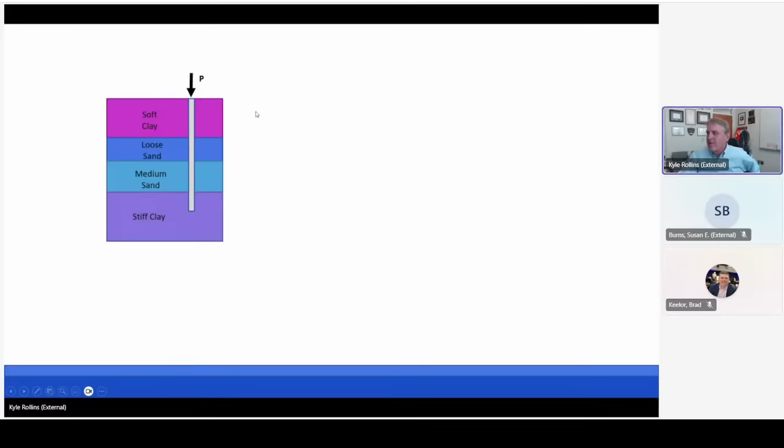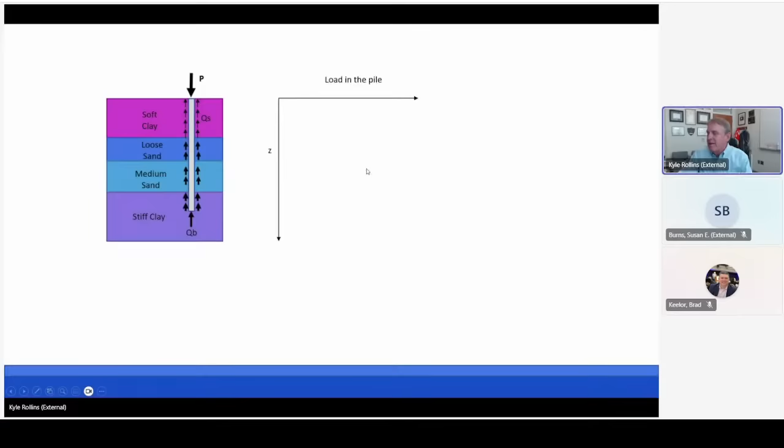When we look at soft profiles that might have liquefiable layers, one approach is typically to use driven piles or drilled shafts. And then in that process, the applied load P here is carried by side friction, Q sub S, along the length of the pile, and toe resistance, Q sub B. If we plot the load in the pile versus depth here, we'll start out with a load of P at the top of the ground surface. And as we go down into the soil, we'll have a reduction of load in the pile as load is transferred to the soil by side friction.

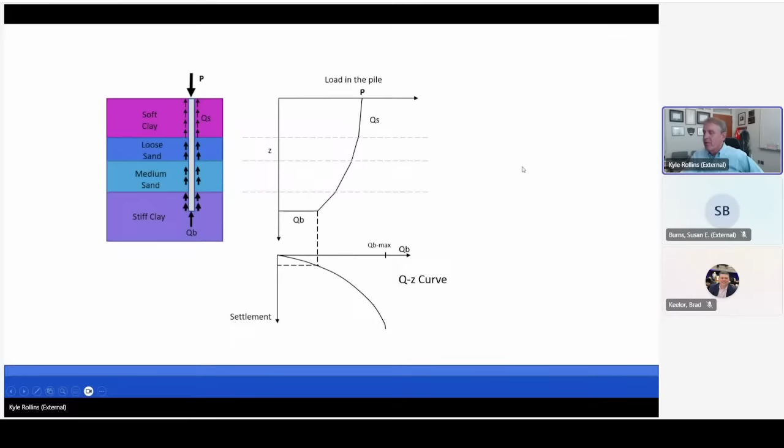At the bottom of the pile, we'll have a toe resistance that has to be carried by the base of the pile. Now that toe resistance can only develop with a certain amount of settlement, and we can estimate the settlement that might take place with a QZ curve. That's the toe resistance versus the toe settlement. So when we first develop the load on the pile, this will be our settlement.

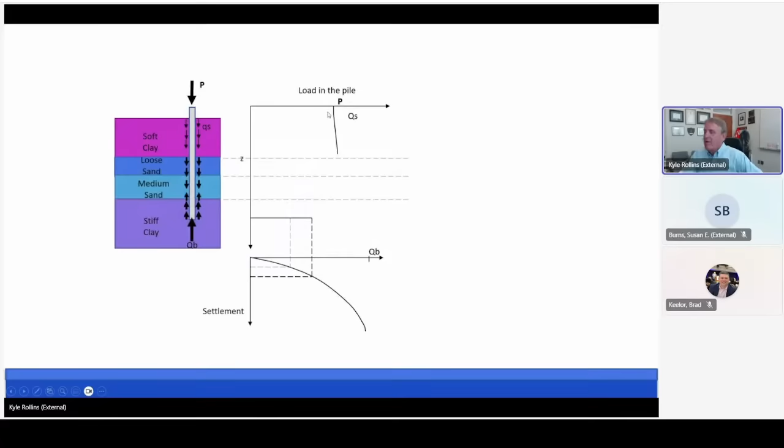If we have an earthquake event that causes shaking, the loose sand and medium sand might liquefy. And as that soil liquefies, the side resistance in that liquefied zone may go to close to 0, or maybe some small value residual strength. And that causes an increase in load to be transferred to the toe. And that increased load at the toe increases the settlement as well. Now, that's not all there is to it, because as the pore pressures dissipate and the soil starts to settle, we develop downdrag or negative friction or drag load in the top layer of soil, in this case, the soft clay. And that's not the only problem we might have, because now that's going to cause some additional settlement to take place.

Some people suggest using just a 0 value of negative friction in the liquefied zone. But if you think about it, the only way that the soil is going to really settle is if the excess pore pressures start to dissipate. And as they start to dissipate, effective stress goes up, and friction can develop on the side of the pile, which leads to downward force on the pile, or drag load. Now that process can lead to even additional settlement at the toe of the pile. So we need to take into account all these factors.

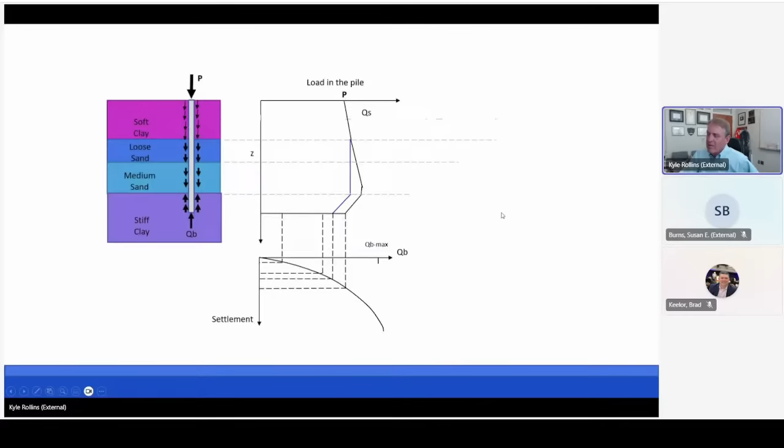From our testing in the field, and from testing at Brigham Young, and from centrifuge tests that have been done at UC Davis, there's good evidence to believe that we should design for something more than a 0 value in this liquefied zone. Now, we can identify the neutral plane here as the boundary between negative friction and positive friction. And that neutral plane also will give us a point, typically for simple problems like this, where the settlement of the soil is equal to the settlement of the pile.

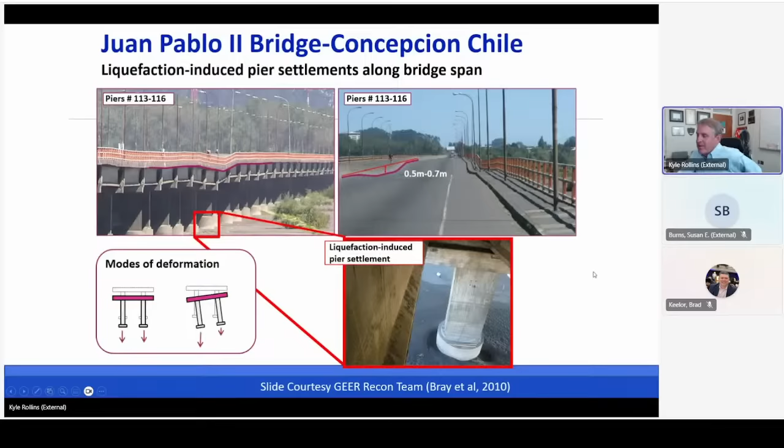Now, can this ever cause problems? Is this just something for academics to worry about? In the Concepcion, Chile earthquake in 2010, there was substantial damage due to liquefaction. And on Juan Pablo II Bridge, there were sections where the piles settled 0.5 meter or more. And investigation suggests that negative friction was playing a role in this excessive settlement.

At the Resurrection River Bridge in Seward, Alaska, during the 1964 Alaskan earthquake, liquefaction occurred even in these gravelly soils on the bridge abutments, and the settlement was great enough that the piles actually pulled out of the pile caps due to negative friction and drag loads. So it's a problem that we need to worry about.

Our research objectives over the last 10 years or so have been to measure the development of negative skin friction during liquefaction and reconsolidation. We want to see what happens to the non-liquefied soils above the liquefied layer and in the liquefied sand. We want to see if the neutral plane concept can account for the pile settlement that we're expecting to see. We've also tried to investigate whether tapered piles can reduce negative friction in comparison with cylindrical piles, and investigated both liquefied and non-liquefied cases.

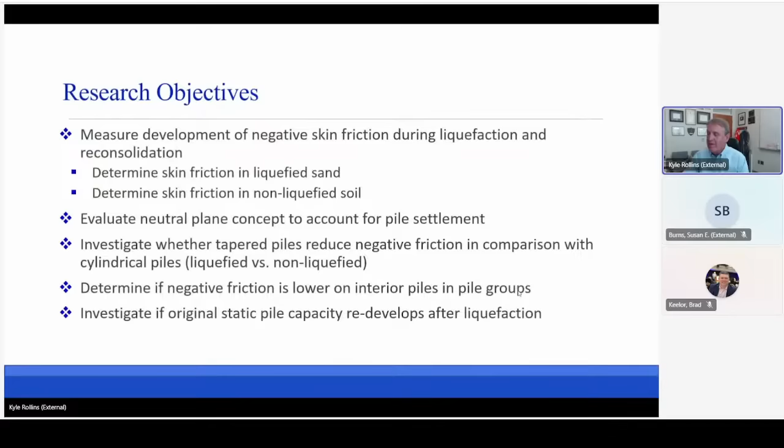And if we get time, we'll look at the behavior of pile groups where we think negative friction could be lower on the interior piles in the group, and investigate last if the original static capacity can redevelop after liquefaction has taken place, or if we need to account for that reduction going forward.

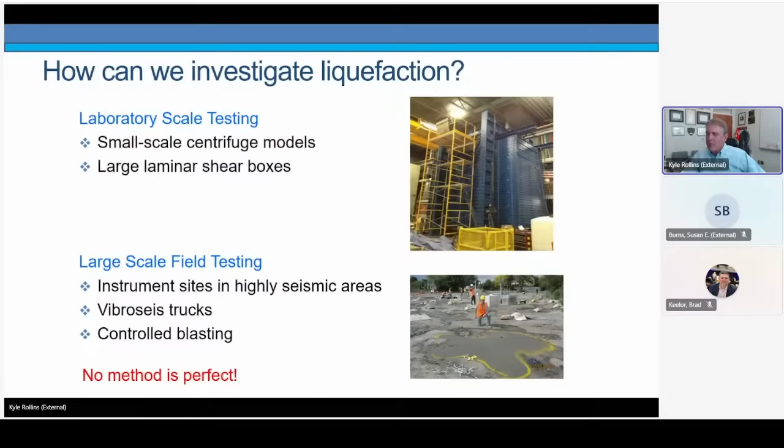If you look at large-scale tests, maybe you could instrument a site in a highly seismic area. Hopefully, while your instrumentation is all working, an earthquake would strike and you'd learn something about what's going on. This is a long waiting game. Other alternatives would be to use vibroseis trucks like T-Rex at University of Texas, which can induce cyclic shearing, or use controlled blasting. Now, none of these methods are perfect. Each one has its limitations and advantages. So looking at everything we can get together, it adds another piece to the puzzle to help us understand what's really going on.

When it comes to blast liquefaction, the advantages are that we can test at full scale. We can test the native soil in situ with the real microstructure and aging effects. We can liquefy large volumes at one time to investigate system performance rather than just a small element. And we can liquefy to significant depths, more than 15 meters. And another advantage is that we can produce settlements that are similar to earthquake-induced values, so that we are testing something that is a little more representative of what might happen in an earthquake.

Limitations are that the mechanism of pressure generation is not identical to an earthquake, although shear strains are the predominant cause of pore pressure generation. We need to calibrate the blast conditions to earthquake conditions, and that's going to require some more research. And we have to avoid vibration disturbance to adjacent people and structures. Lastly, the full-scale testing is more expensive than small-scale tests.

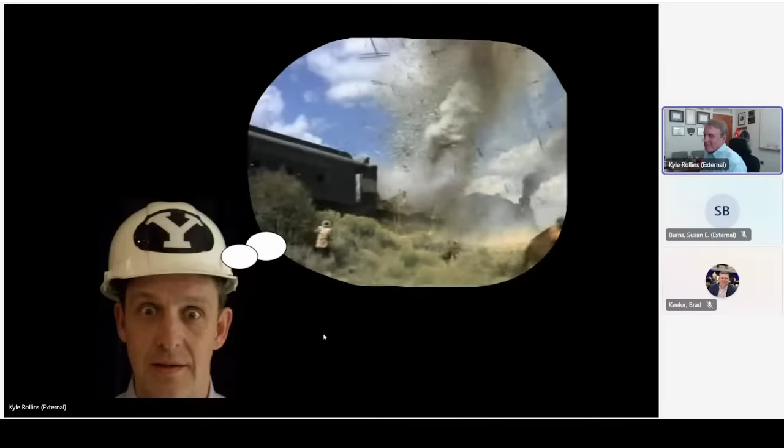So when I first heard about blast liquefaction, my mind went back to a Western called Butch Cassidy and the Sundance Kid, and this is the image that came to my mind. Butch was trying to use enough explosives to blow up the safe, get the money out. Think you're using enough dynamite there, Butch? So this is always a concern.

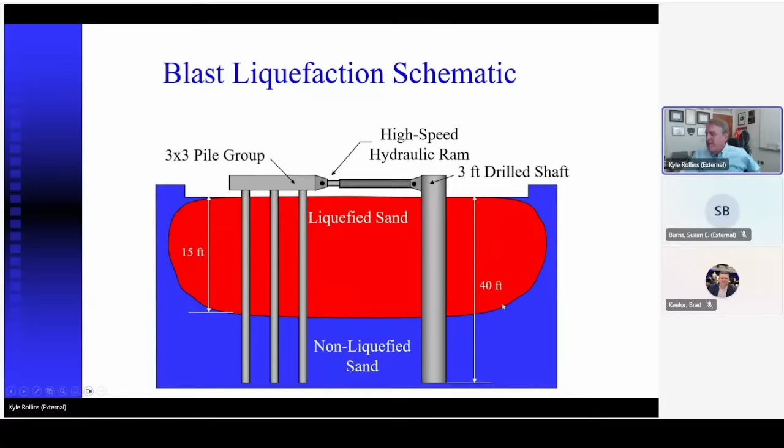We went to our first test site to do this in Treasure Island in San Francisco Bay. We were testing a 3x3 pile group against a 3-foot diameter drilled shaft. And we set off a series of small explosive charges, maybe 1 to 2 pounds, to liquefy a volume of soil. And then we used a high-speed hydraulic actuator to push the pile group against the drilled shaft. And we found that we could successfully liquefy soil and perform these tests without too much problems.

And so we started to look at other than laterally loaded piles in liquefied soil. We started doing tests to evaluate negative skin friction in downdrag conditions. So the first one was in Vancouver, British Columbia, a 32 centimeter, so a 1-foot diameter, steel pipe pile. Went to Christchurch, New Zealand, and investigated 2-foot diameter auger cast piles. Went to Mirabello, Italy, working with INGV, an Italian research agency, with I think 10-inch micro piles. Worked with Rick Coffman at the University of Arkansas in Turrell, Arkansas, looking at large drilled shafts and 18-inch driven piles.

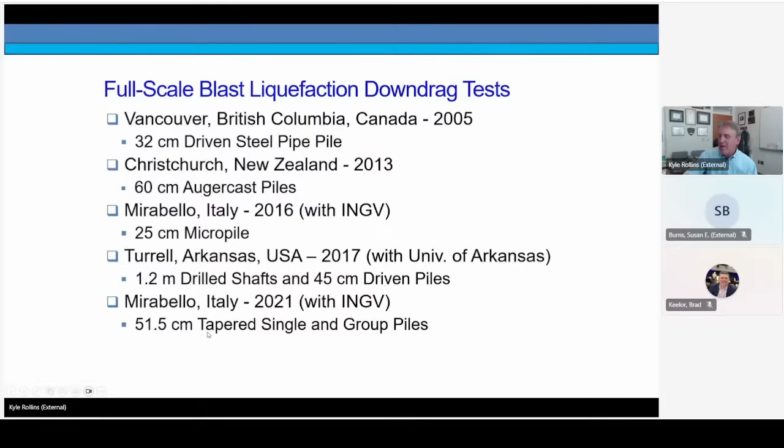And lastly, we've done some tests back at Mirabello, Italy again, with tapered single piles and pile groups to see how that might affect results. So I'm going to give you, before I start, our take on a design procedure for pile downdrag assessment.

And then the rest of the time, I'm going to try and indicate the evidence for what we're doing. So the first thing we need to do is estimate the settlement versus depth profile and assume a neutral plane location. So we could use any of a number of curves and equations that are out there to estimate the settlement versus depth.

So if we have our pile here and we've got a zone that might liquefy, we estimate the settlement, knowing the factor of safety and the density of the soil. So we could plot this settlement versus depth. And then we have to make an assumption about the neutral plane. So we're just going to make a guess to start with. We'll probably have to change it, but we just start out with a guess.

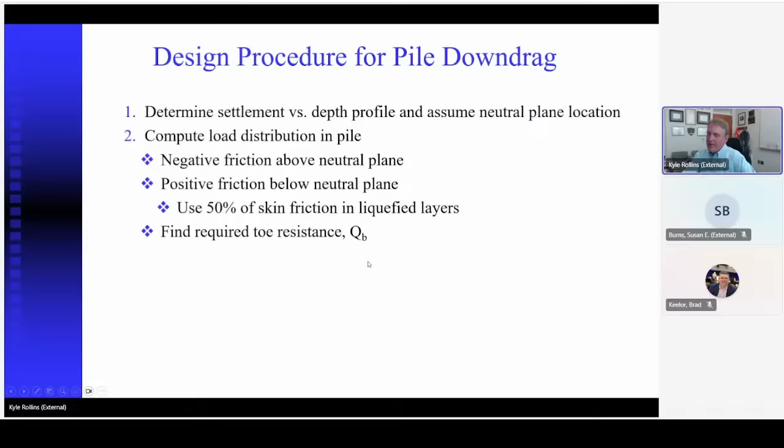Knowing that neutral plane location, we're going to compute negative skin friction above the neutral plane and positive skin friction below the neutral plane. And we're going to use 50% of the skin friction that we would have at the ultimate condition prior to liquefaction for the liquefied layers. And then we'll find from that the required toe resistance, Q sub B. So here's our applied pile load. We'll develop negative skin friction above the neutral plane, positive skin friction below the neutral plane. And then at the bottom, we'll determine the toe resistance that we have to support.

Now the next step is to determine the settlement at the toe of the pile. And we can get that by saying that the settlement of the pile at the neutral plane is equal to the settlement of the soil. We can subtract the elastic compression in the pile going down and get the settlement at the toe of the pile. We can add the elastic strains to the top and get the settlement at the top of the pile as well. So we next need to use a QZ curve to determine if the mobilized Q_B for toe settlement is equal to the required Q_B.

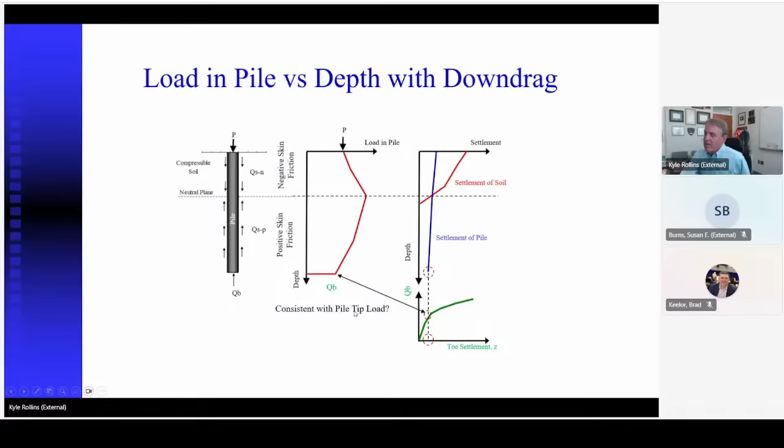So we're going to take this toe settlement and come up to our QZ curve. And then we have to compare to see if we have compatibility. Is it consistent with the toe tip resistance that we're expecting? And then we'll likely have to revise the location of the neutral plane and repeat the process until we get convergence.

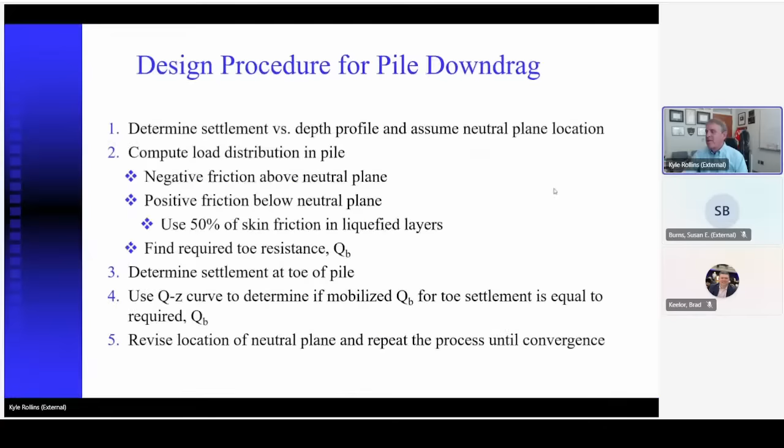So the first test we performed was in Vancouver, Canada, and it's reported by Rollins and Spencer. If you're a structural engineer, you might think a bridge would be a good idea here, but Massey Tunnel is located underneath the Fraser River at this location. And we got permission to do tests at this Canadian liquefaction experiment site. The soil profile at this site consists of fine sand and silty sand with some silt layers, which were not considered to be liquefiable.

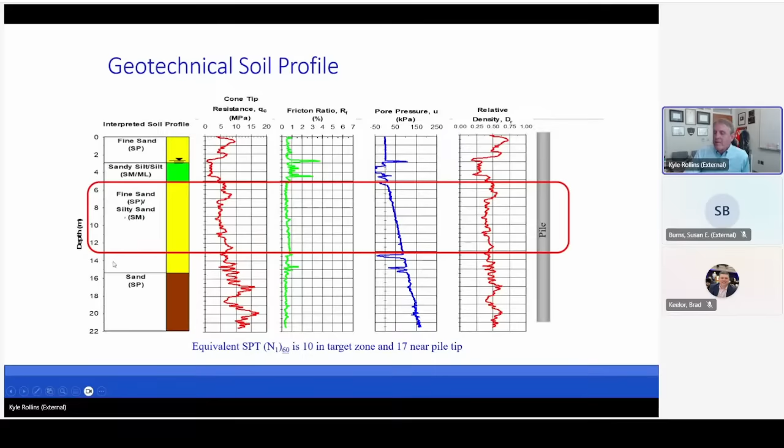The relative density is typically about 40% in this zone. Based on frozen samples, the equivalent SPT was taken as 10 in the target zone, and the value was 17 near the toe of the pile down here, which was about 21 meters below the ground. So our objective was to target this zone from about 5 meters to 13 meters to be liquefied with the explosives.

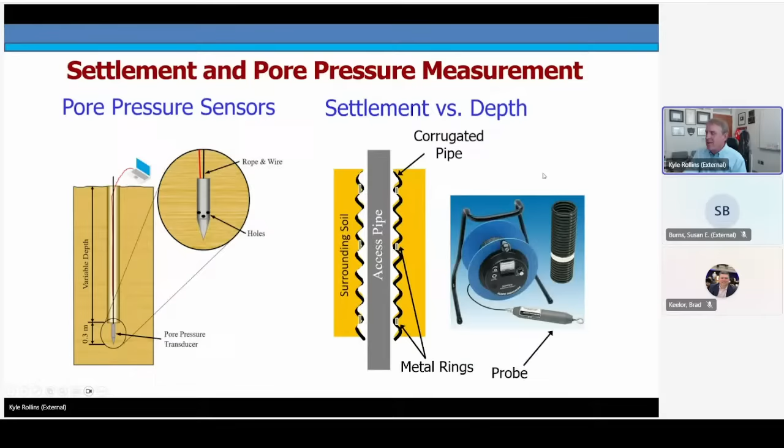So we had pore pressure sensors located at various depths throughout the profile. These can take the high transient blast pressures and not be damaged and give us reasonable accuracy, maybe 0.1 psi for the residual excess pore pressures. We also had a Sondex settlement system to monitor settlement versus depth. This consists of corrugated pipes with metallic rings. With this probe, we can identify where the rings are to start with and then go in and see where they ended up afterwards.

So when the explosives went off and the soil liquefied, you can see that drill rod settled about a foot. The settlement at the time of the blast caused a decrease in the force in the pile, about 160 kilonewtons or 36 kips.

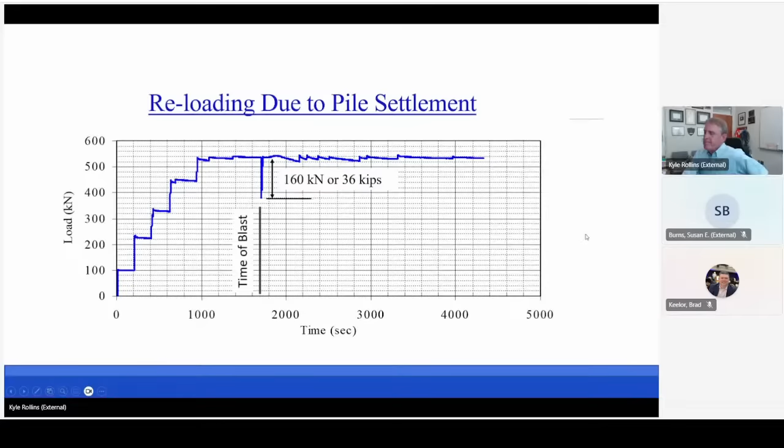After the blast detonation, the excess pore pressure started to dissipate with time. It took about, I think, 17 minutes for the excess pore pressures to dissipate back down to less than an RU of 0.1. The pore pressures dissipated from the bottom up. The top pore pressure sensor had the highest pore pressures throughout the dissipation process, or excess pore pressure, I should say. So let's take a look at the settlement trough that developed around the pile.

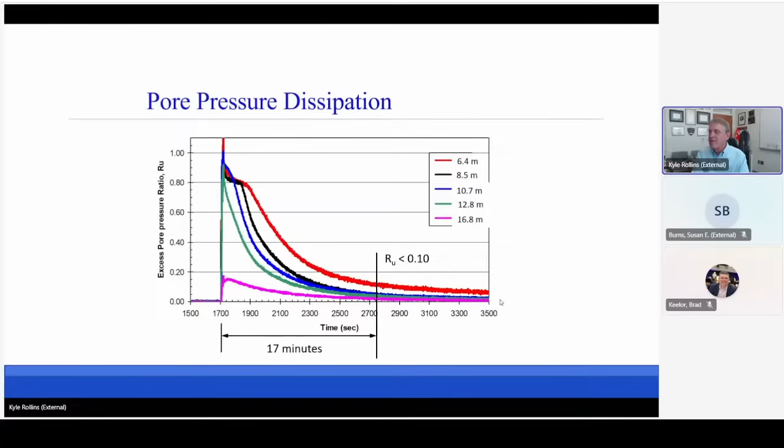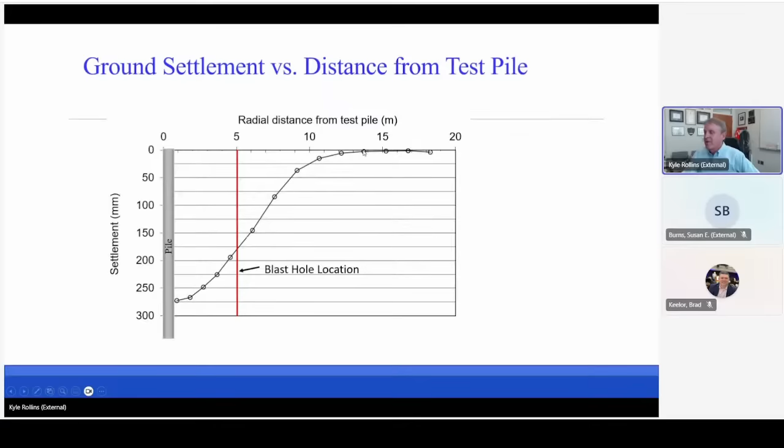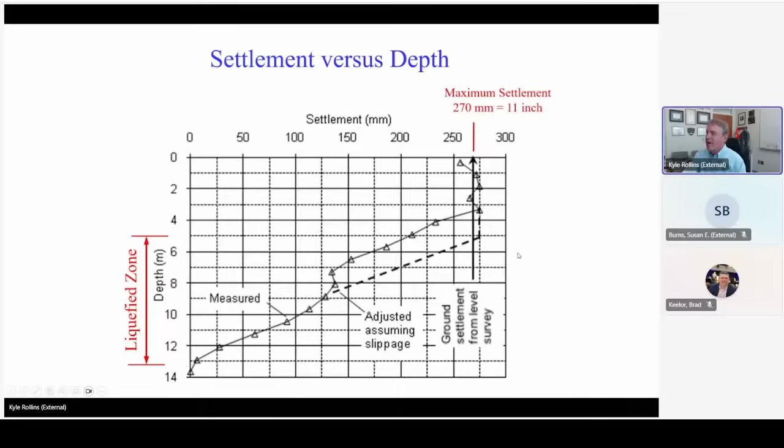This plot shows the settlement versus depth from the Sondex device. We think there's some slippage that takes place here, so we've extrapolated this out. And from the Sondex, we're measuring about the same amount as we're getting from the ground surface surveys. So a fairly linear settlement versus depth profile here with a maximum settlement of 11 inches.

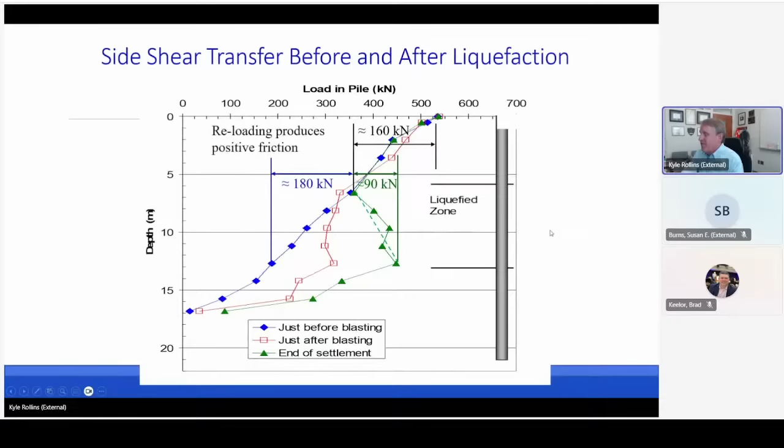If we look at the positive ultimate skin friction before the blast, it's about 180 kilonewtons in that liquefied zone. After liquefaction, the average resistance is about 90 kilonewtons. So our average resistance in the liquefied soil from negative skin friction is about half of the resistance that we'd expect to occur.

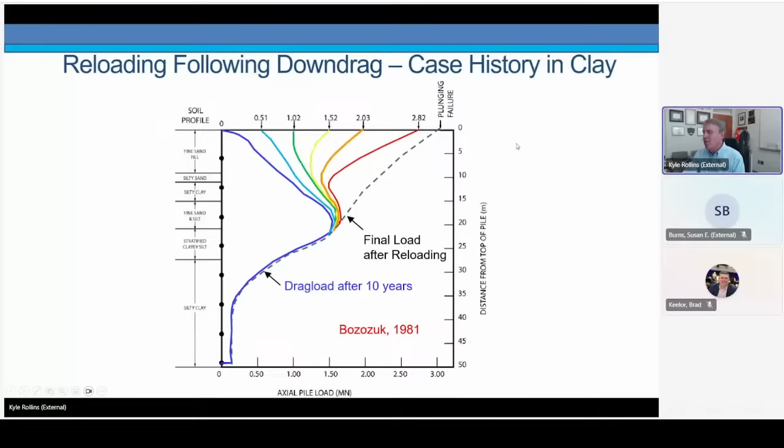And as they loaded the pile from the top down, you can see that the negative friction is decreasing and becoming positive, and eventually experience a plunging failure. So it's not unusual to see a positive skin friction develop from the top downward when we reload after liquefaction.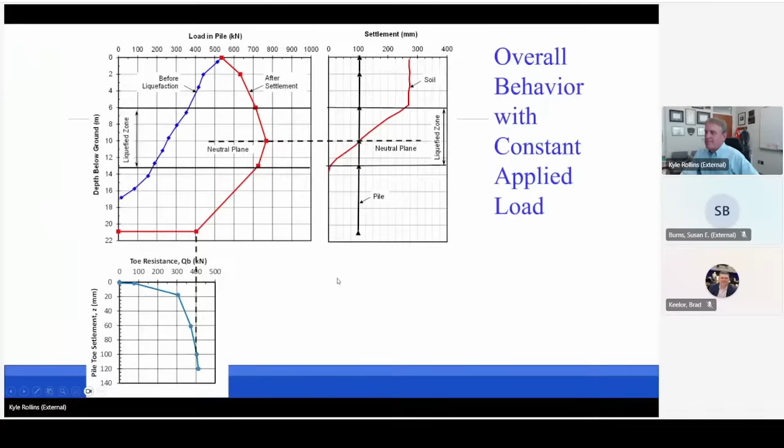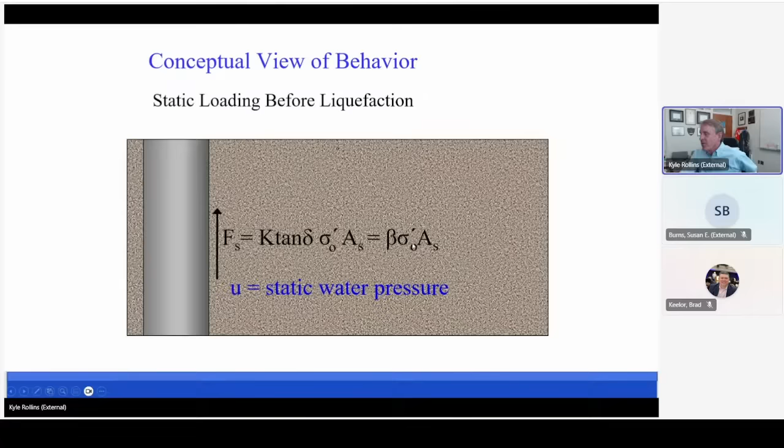Now, from a conceptual view, under static loading before liquefaction, we could estimate our side resistance as K times the tangent of the interface friction times the vertical effective stress times the area of the side. Or we could use a beta value times the initial vertical effective stress times the area of the side, using the static water pressure for the effective stress. Immediately after liquefaction, the excess pore pressures have increased to the vertical effective stress, and our side resistance goes down to a very low value, or 0, which is what we saw in the test.

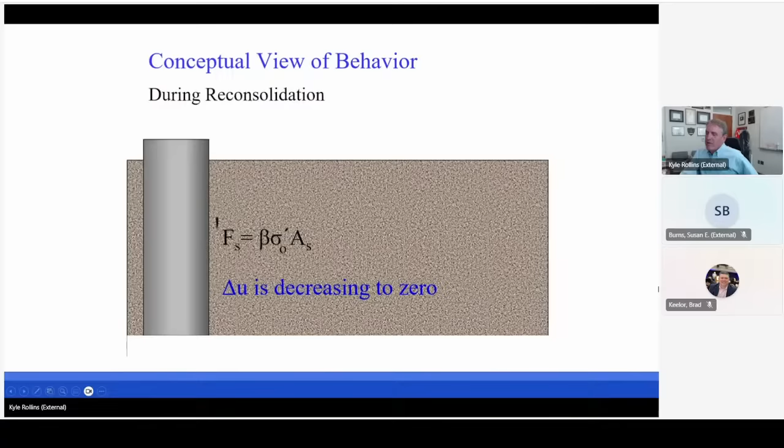So our beta value would be 0 relative to the initial vertical effective stress. Now, during reconsolidation, the pore pressure is decreasing to 0 and the effective stress is increasing. So our negative or downward friction is increasing. And from this test, we found out that beta during reconsolidation at the end of the test was 50% of the beta that we had for ultimate positive skin friction before liquefaction.

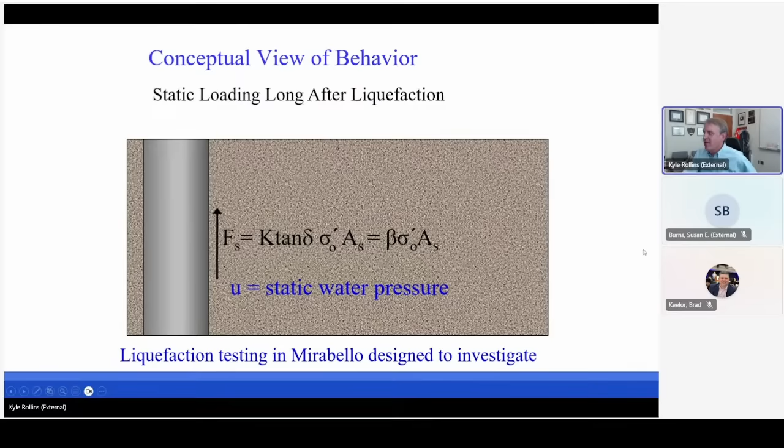Now, one question that remains unanswered from this test in Vancouver is what happens long term? Does our side resistance regain its strength after liquefaction, or do we have a permanent loss in strength? And we'll look at that a little later. The next opportunity we had to do, well, let me go back and just say that one test is not enough to build a design procedure on. But we didn't have a lot of opportunities to do another test until the

Christchurch earthquake sequence in 2010 to 2013, which caused tremendous damage in New Zealand, $40 billion worth of New Zealand dollars worth of economic impact. And 33% of that loss was due to liquefaction-induced damage. Our colleagues in New Zealand invited us to help with the blast liquefaction test program, and they gave us a site where we could do a downdrag test.

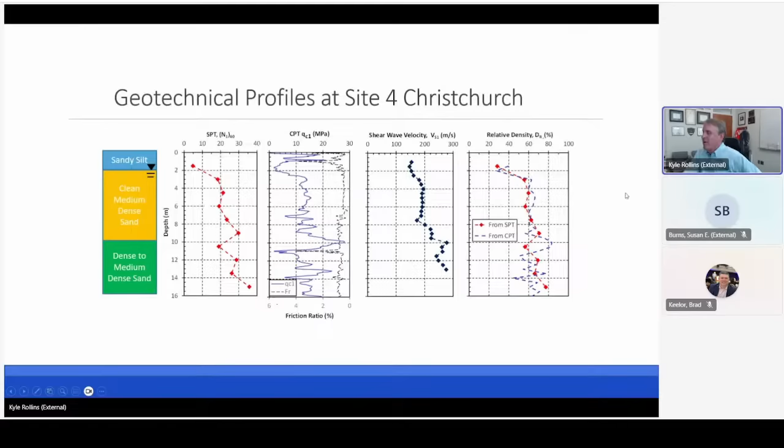The soil profile at this site in Christchurch, where we did these tests, site 4, consists of sandy silt to 2 meters, where the water table typically was located. And we had some clean medium dense sand and some dense to medium dense sand below that. We have q_c values of about 12 megapascals, shear wave velocity less than 200, indicating it could be liquefiable, and a relative density of 60%. Now, this is the case after this had been subjected to multiple earthquakes and aftershocks, so that the relative density before these tests that we did is probably lower than this.

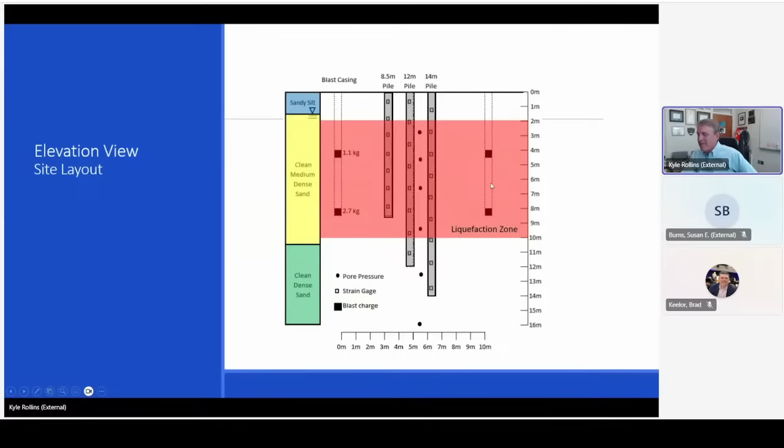So we had a contractor in New Zealand install auger cast piles designed to be 0.6 meters or 2 feet in diameter. We put one into 8.5 meters, another to 12 meters, and another to 14 meters, so that we could see how things would vary with piles that went through the liquefied zone in contrast to piles that were embedded in the liquefied zone. And this is our estimate of where we might see the liquefied zone.

We had 2 opportunities to do this. One where the piles were not loaded, so they're just sitting in the ground. We set off the explosive charges and liquefied the soil around it. And then we did another test where we have 270 tons of load produced by these crane mats and sorted weights that's acting on the pile. So we applied those after the first test, helped us get some idea of load deflection behavior of the soil, and did a subsequent test.

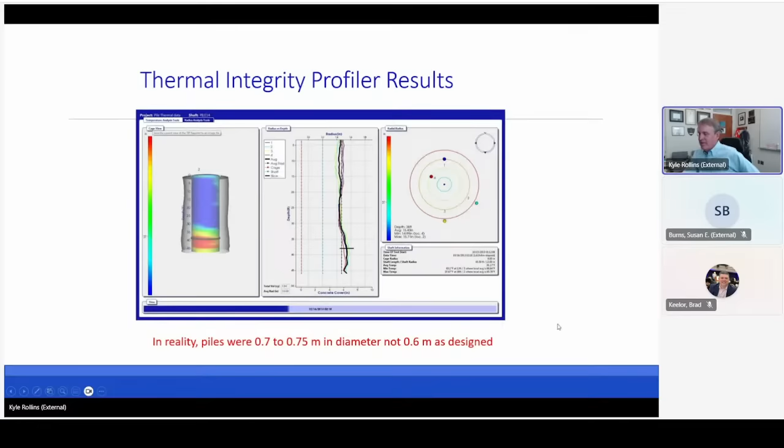We had instrumentation to give us the strain gauges with sister bars and thermal integrity sensors to give us a better estimate of the diameter. And that turned out to be really useful to have this information, because the piles turned out to really be 0.7 to 0.75 meters in diameter, not 0.6 as designed. So this instrumentation was very helpful. So let's look at what happened for the test with no load on the piles.

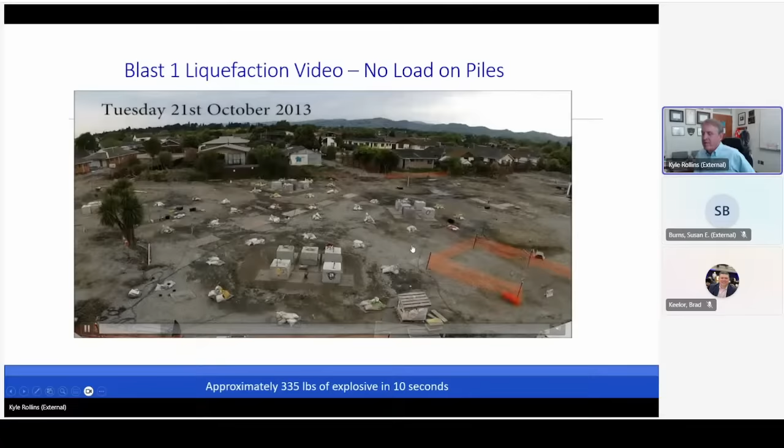Here's the blast going off. You'll see about 335 pounds of explosive being detonated in 10 seconds.

So my wife asked if they actually pay me to do this, and I say, yeah, they really do.

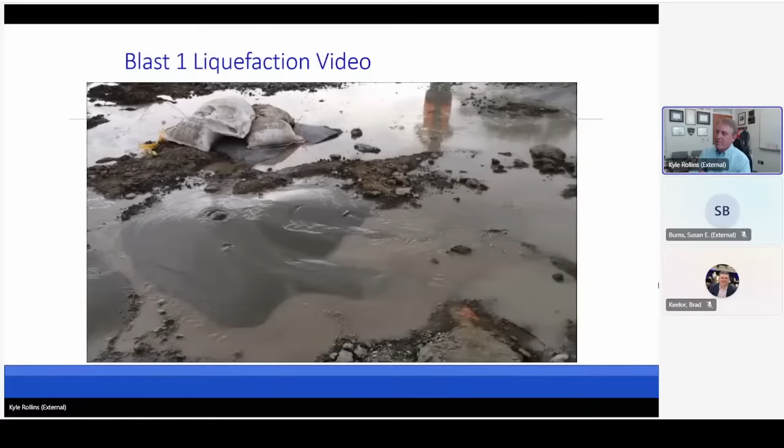Our test piles were over in this area. These other areas were different ground improvement strategies compared to an untreated area. As soon as those went off, we could see pore pressures being developed that brought sand to the surface and created the typical sand volcano or sand boil that you'd expect to see. So this went on for 15 or 20 minutes, and we got some fairly large sand boils developing.

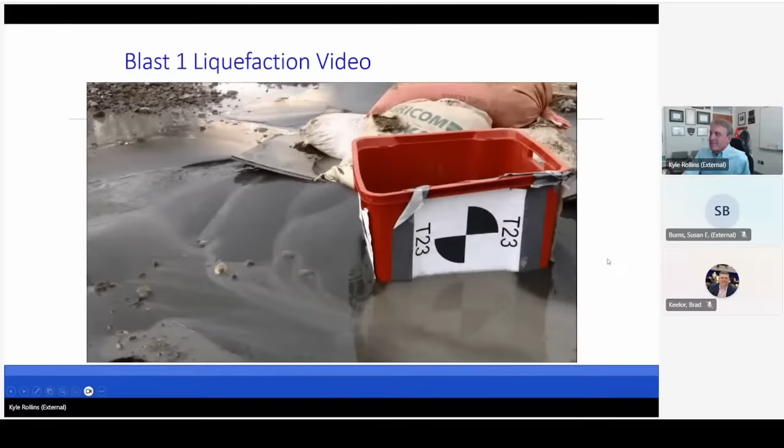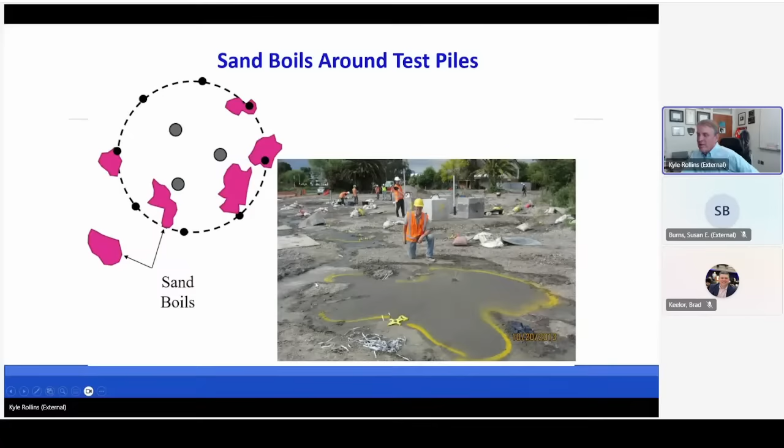So this is me kneeling in front of one of the sand boils. You can see it's pretty large. This shows the sand boils that developed around our test piles.

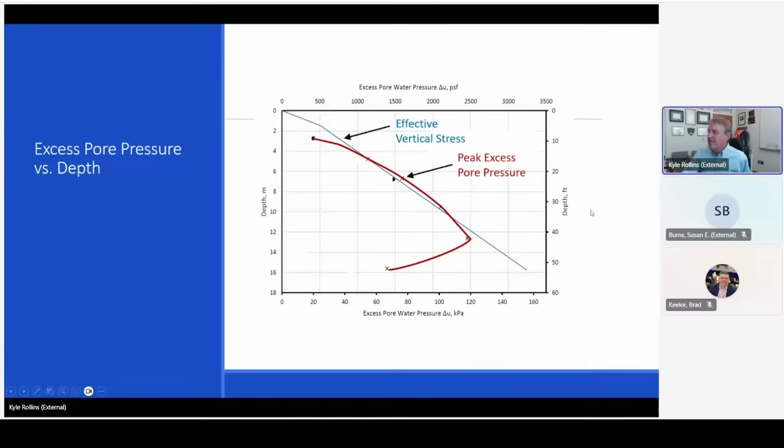So we're plotting here in this diagram the excess pore pressure versus depth. This is the effective vertical stress in the profile. And we developed excess pore pressures that were high enough to equal the vertical effective stress prior to blasting. So we'd liquefied down to maybe 13 meters.

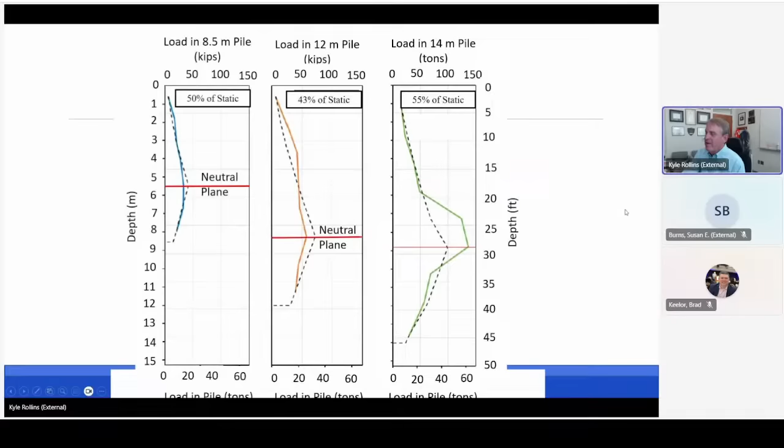So from laser scan from Michael Olsen at Oregon State, we found that the ground was settling more than the piles at the surface. And I'm showing here plots of the load in the pile versus depth for the 8.5 meter pile, the 12 meter pile, and the 14 meter pile. The colored lines are the cases or what was measured. You can see that there's a neutral plane in each case. It goes a little deeper for the deeper piles. There's negative friction above, positive friction below.

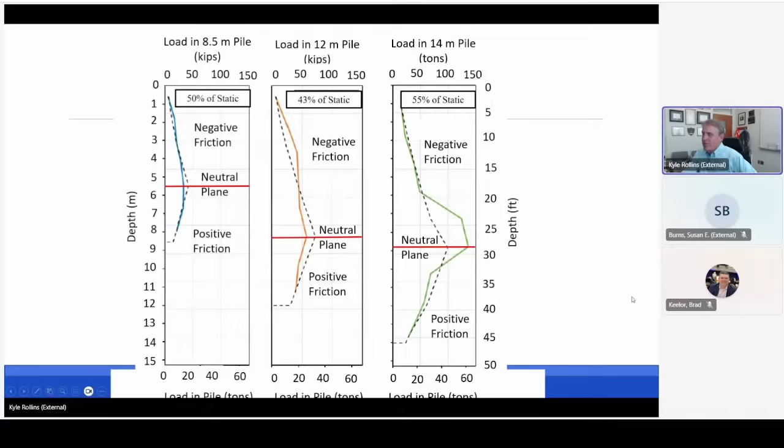Now this dashed line is our best average of the percentage of the positive ultimate resistance we needed to get agreement with what was measured. Over here, I think this must be an offset in the strain gauge from the blasting, but I think you can see the trends that are taking place here. Now, overall, the negative friction in the liquefied sand layers at the end of consolidation was between 43 and 55% of the positive ultimate friction before liquefaction.

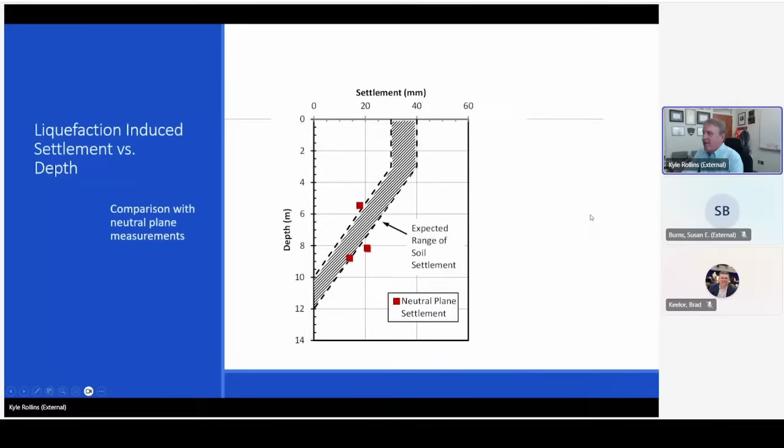So now this is giving us a little more confidence that the value from Vancouver, Canada might be a realistic thing. We're plotting here the settlement that was measured at the neutral plane in comparison with the range of soil settlements that were measured. And we're not too far off of the values that were expected there for the neutral plane assumption. Then again, we applied these loads to the pile so that we eliminated the negative friction that had been developed from the first blast test, and used this loading to get load versus deflection curves to give us capacity of the pile.

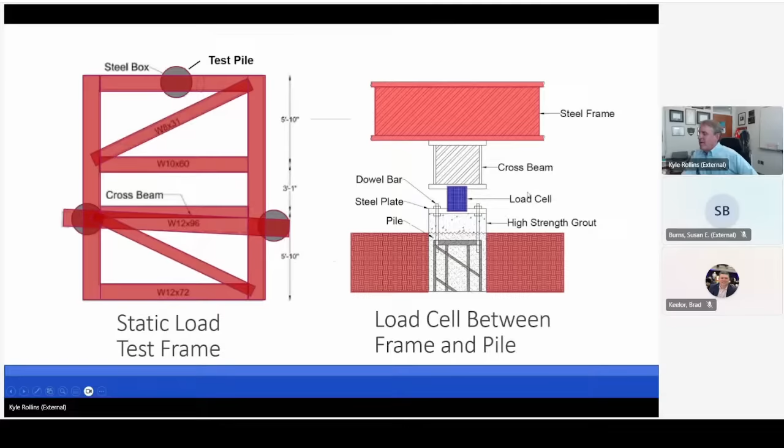I started to get pretty worried the night before this test that this whole thing was going to tip over. So I tried to shift the weights around so that we had more of the weight on these back piles here and less on this front pile that was settled, that was going to be in the liquefied zone, to try and keep things in equilibrium. We had a steel frame to support the weights and test piles to carry the weight of all those 270 or 300 tons, English tons. And over each pile, we had a load cell that told us what load was being carried by each of the piles throughout the test program.

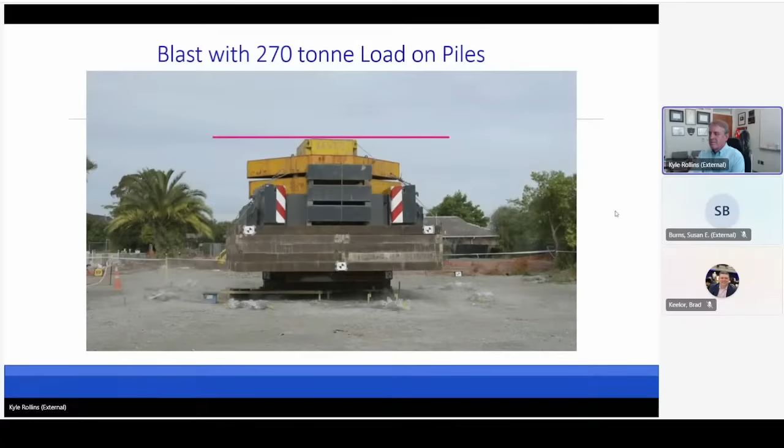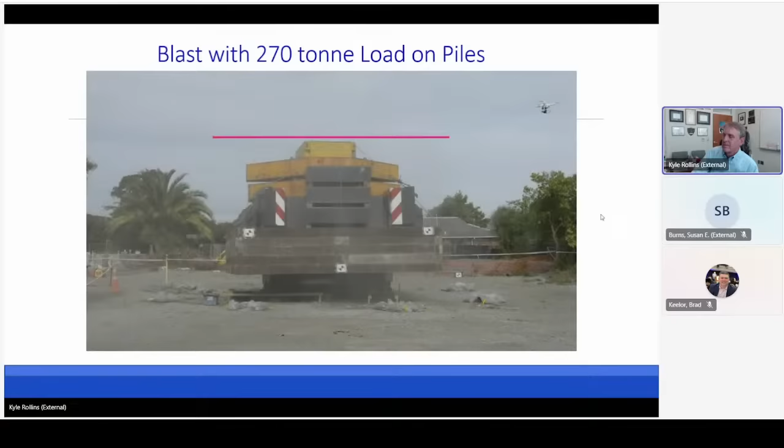So this is a video of the test blast going off. I've got a line in here for you to see how the settlement is taking place with time. So you can see that a large amount of the settlement occurred when the friction went to zero in the liquefied zone, but some additional settlement still took place afterwards as the soil reconsolidated. You can see that there's a tilt here, and you can see also the sand boils that developed all around the test piles.

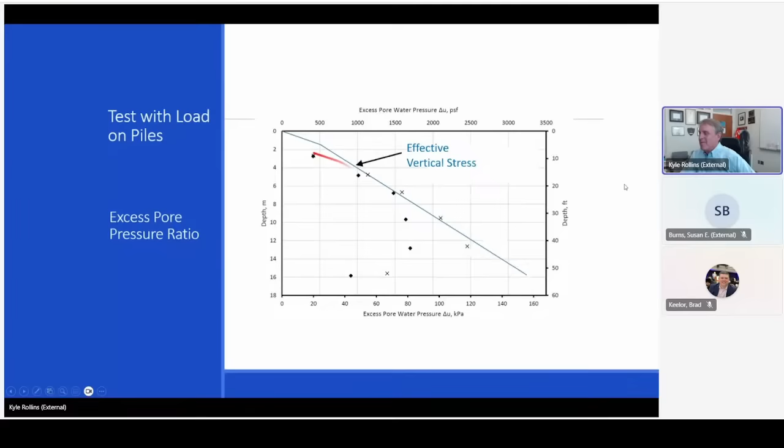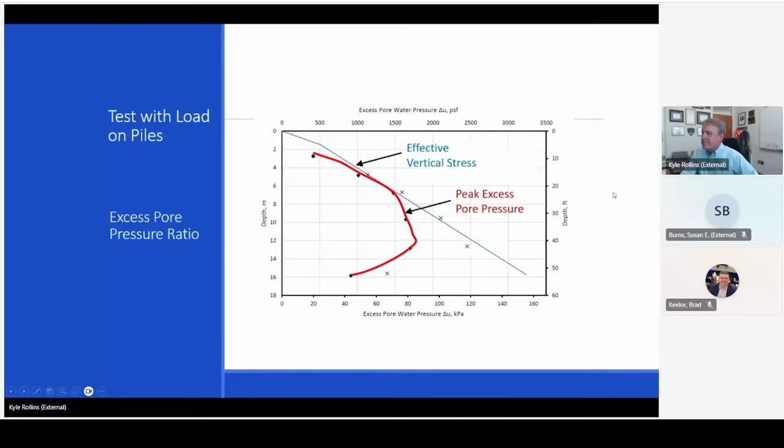In this case, the load on the piles was large enough that we had, and we didn't quite use enough explosives, I suppose, maybe, but we've got liquefaction or close to liquefied state from about 3 meters down to 8 to 9 meters. And nevertheless, the settlement of the loaded piles was more than the settlement of the surrounding ground. And as a result, we have positive friction all the way down, even through these liquefied layers.

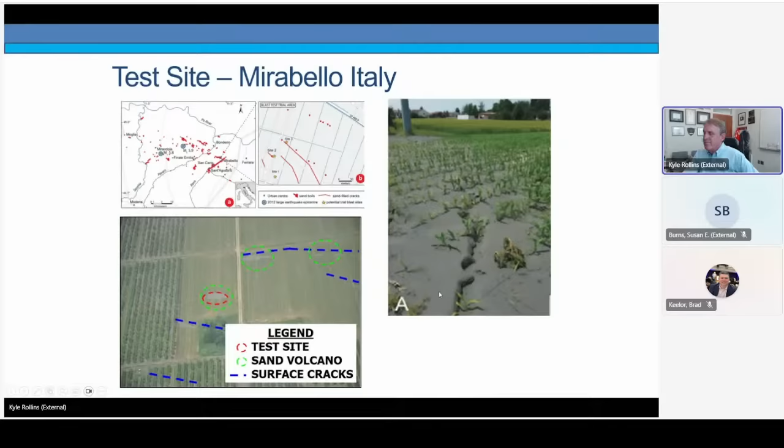We had an opportunity to go to Mirabello, Italy, in northern Italy near Bologna. If you'd had that chance, you ought to take it. This had been subjected to an earthquake in 2012, and there were fissures with sand ejecta and sand boils throughout the area. So we knew this was an area of liquefaction. Liquefaction ejecta came to the surface even though there was 6 meters of silty clay to clay silt in the soil profile.

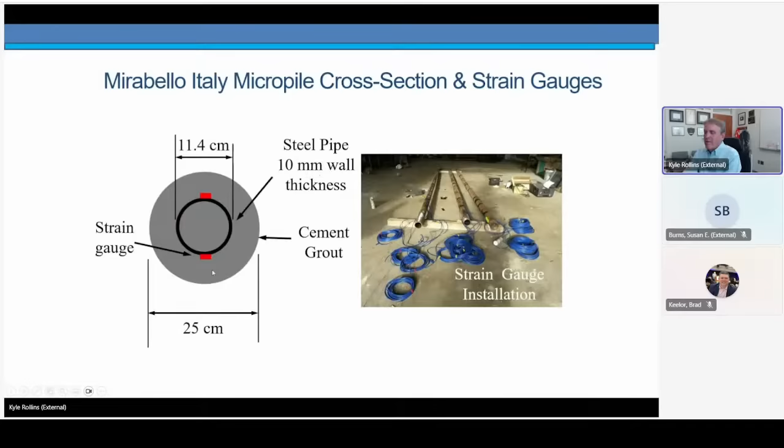This is the cross section. There's a steel pipe that serves as the reinforcement. It's 10 millimeter wall thickness, and we have these strain gauges around on either side and cement grout. We exhumed them afterwards to see that we were getting what we thought, and it looked like it was about what we'd planned. We didn't have the money to do a static test, but we did do drop tests to evaluate the static pile capacity.

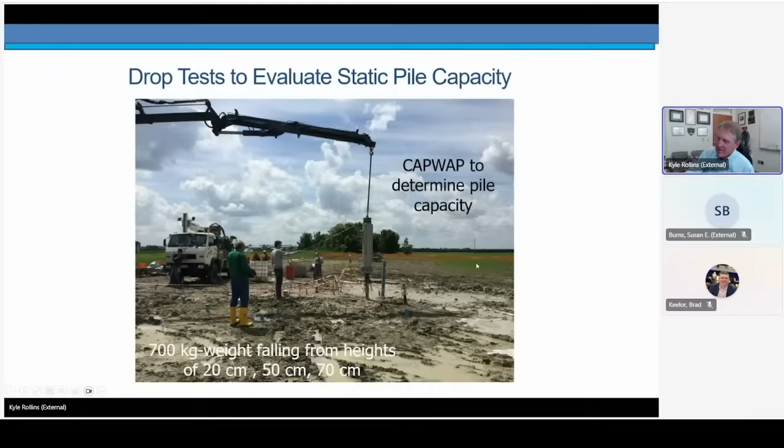So the red or orange curve here is showing the load in the pile based on the CAPWAP analysis, and the blue is the average resistance after the blast. So this is the zone that was liquefied. Our neutral plane sits up here a little higher. That's where the ground settlement was equal to the settlement of the pile. Then we have positive friction below, going down to a value of 187 kilonewtons at the tip.

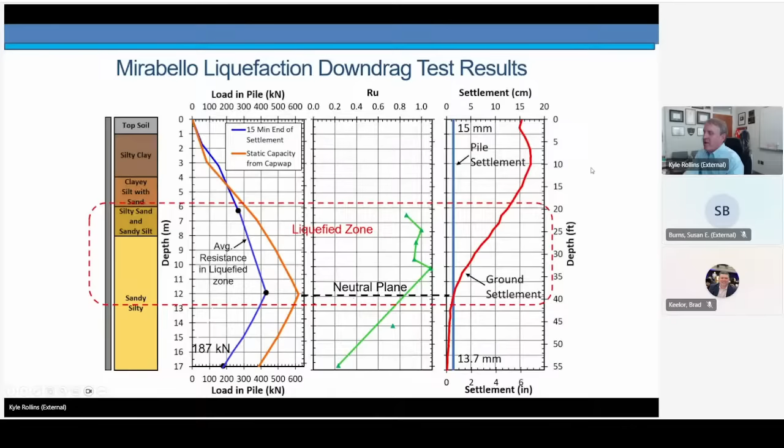By taking the value of settlement of the neutral plane and subtracting out the elastic compression, we get a settlement of 13.7 millimeters. And adding in this part, we get 15 millimeters of settlement, which is consistent with what we're measuring.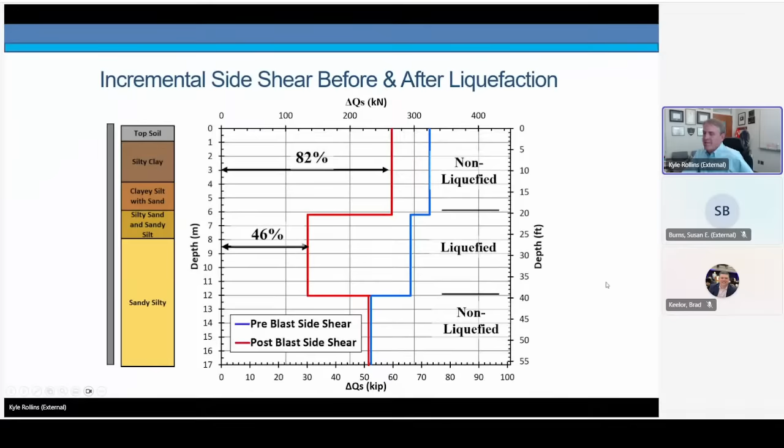In the liquefied soil, we thought maybe this is a potential way to mitigate the hazard of downdrag or negative skin friction, drag load, because the soil might settle away from the pile. But it could also flow into and come back into the pile. So we're looking at that possibility.

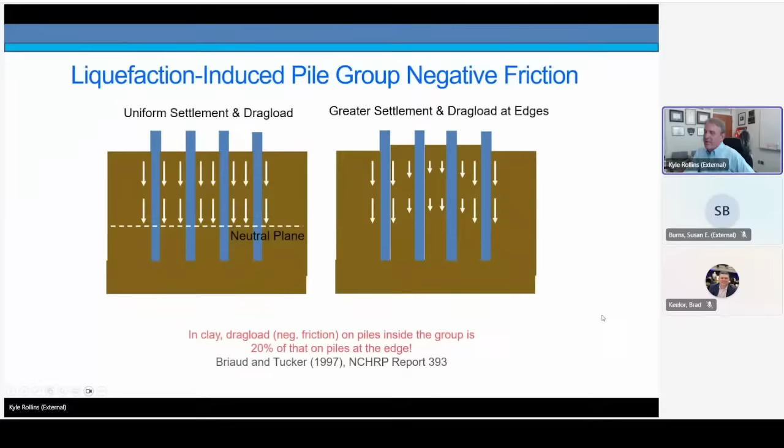When we look at liquefaction induced downdrag in pile groups, we sometimes think that this will be all a uniform settlement down to the neutral plane with negative skin friction. But limited tests show that there might be greater settlement and drag load at the edges than on the interior of the pile group. And Briaud and Tucker in 1997, their NCHRP report found that in clays, the drag load or the negative friction on the piles inside the group was about 20% of that on piles at the edge.

Geo-Fondazione, a pile driving contractor, donated all the piles and the cost for the tests. We donated our time to come do the test with them. Here's the setup. We have 3 single piles with reaction piles for each of those piles so that we can do tests after the blast. We have a group of 13 piles here that can help us understand a little bit about the behavior.

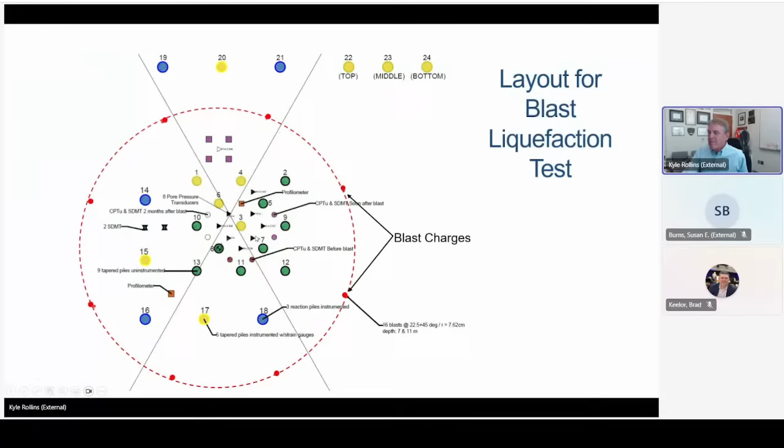And we have 8 blast charges located around the perimeter of a 7-meter ring. Again, we're monitoring excess pore pressure with pore pressure transducers. We have profilometers in place here and here to see what might happen.

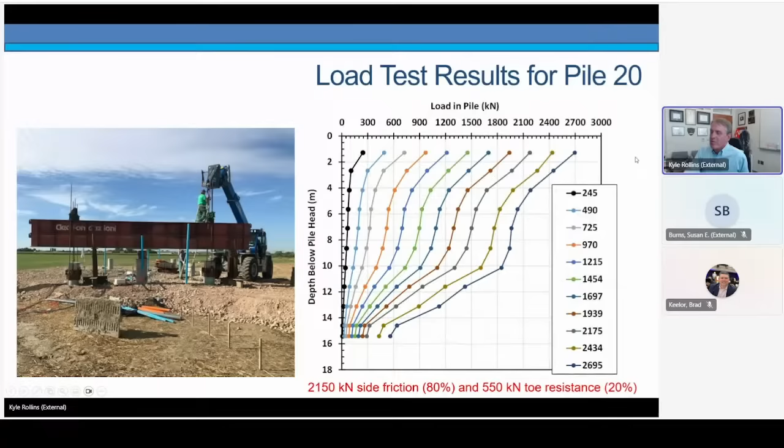And more importantly than just the load versus deflection of the pile, we wanted to know the load versus depth in the pile. In this case, side resistance is producing about 80% of the resistance, because of primarily that tapered pile, and the toe resistance is producing about 20%. So we're getting out to a value of 2,700 kilonewtons at ultimate state. This is as large a load as we probably could have done, a little more if we'd had a bigger frame, but we're maxing out our capacity.

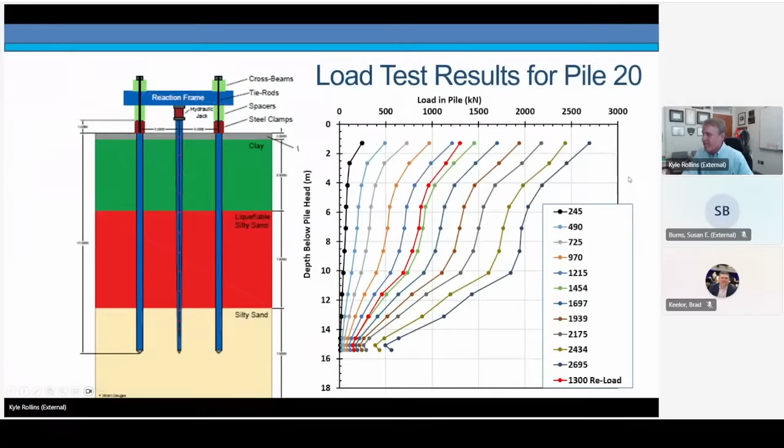We used the data we got from the test to come up with a Q-z curve based on our load in the pile versus depth information. Prior to the blast, we applied a load that was about half of the ultimate pile capacity, and then set off the explosives.

Again, this is that profile. It's a little bit different at this site, some clay and some sandy silt, transitioning at 4 to 4.5 meters. Then we have this liquefied silty sand, and silty sand below it that was not liquefied. So this is a plot of the reload in the pile. Again, it was very similar to the load versus depth curve that we had from the first pile test, developing very little end toe resistance. This, to remind you, is the ultimate resistance shown in green.

Immediately after the blast, we had some increase in load in the pile. And then within the liquefied zone, where the pore pressures were relatively high, 70 to 100%, we saw this nearly vertical load versus depth curve, indicating that the soil had really liquefied. Now, to not repeat our problem that we had in Vancouver, we told the contractor to just let everything come to equilibrium rather than try to maintain that load here.

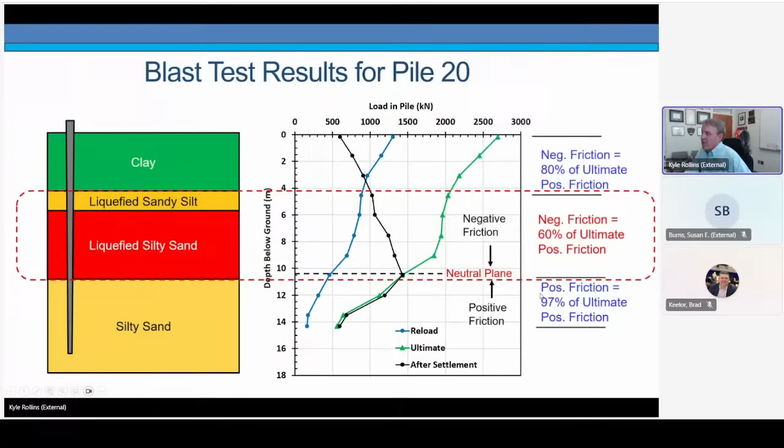If we compare the friction, we're getting 80% of the ultimate positive friction in this clay layer. This could be due to the soil settling away from the pile to some degree. In the liquefied zone, we were measuring an average of 60% of the ultimate positive friction. And below, we're very close to the ultimate positive friction in all that zone below it. So looking at negative friction for the tapered piles, it looks like maybe we could have had a 20% reduction of side friction relative to the cylindrical piles. It could explain what we measured.

But the piles in the liquefied sand are still giving us a value that's very close to what we measured for the cylindrical piles. So it doesn't appear that the tapered pile is having any beneficial effect for the liquefied sand. The soil just flows into the pile surface itself. So it's about the same reduction in side friction for negative friction as what we saw for the cylindrical piles.

Here I'm showing the settlement and the excess pore pressure for the pile group and single piles. There's a little zone here where we don't quite get things liquefied. That might explain the higher than normal load transfer in the pile in this zone. Here again is the zone of liquefaction, or high pore pressure zone.

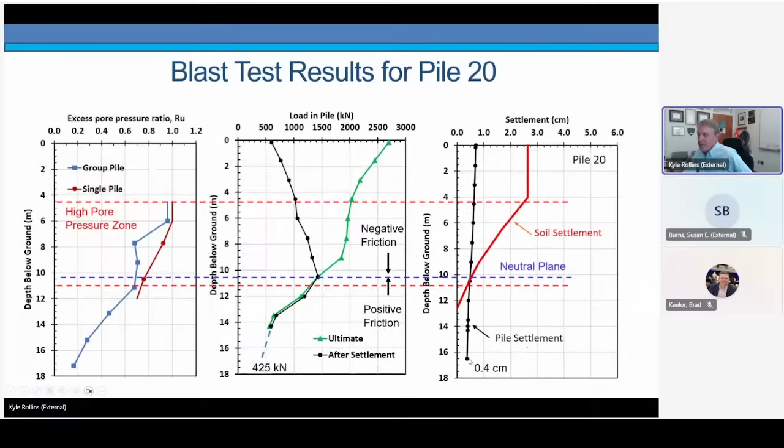And here I'm plotting the settlement of the soil and the settlement of the pile that were measured. So this is our neutral plane, which looks about right. If we extrapolate, we've got negative friction above the neutral plane and positive friction below, like we've seen before. If we extrapolate downward, we would expect a load in the pile of about 400 kilonewtons. There's some wiggle room in that, of course. If we extrapolate to the bottom of the pile here, we would have a settlement of about 0.4 centimeters.

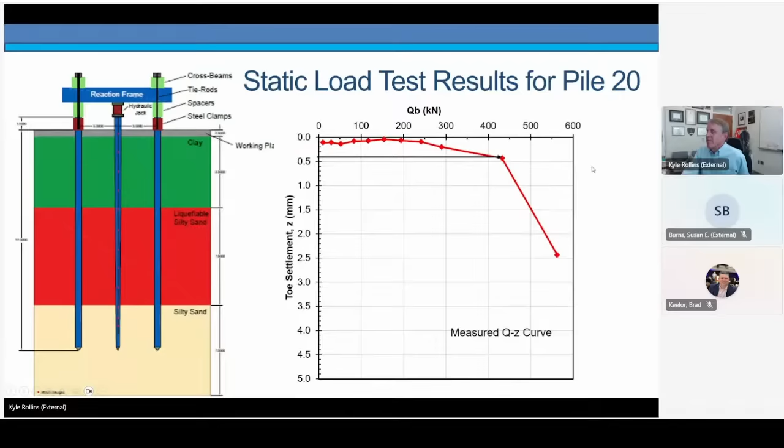So how does that compare with what we would get from our Q-z curve for 0.4 millimeters? We're getting about 430, something like that, very similar to what we were needing to have equilibrium. We did two other tests, and we're getting very similar results. So this appears to be the negative friction; it's not a one-off, it's consistent.

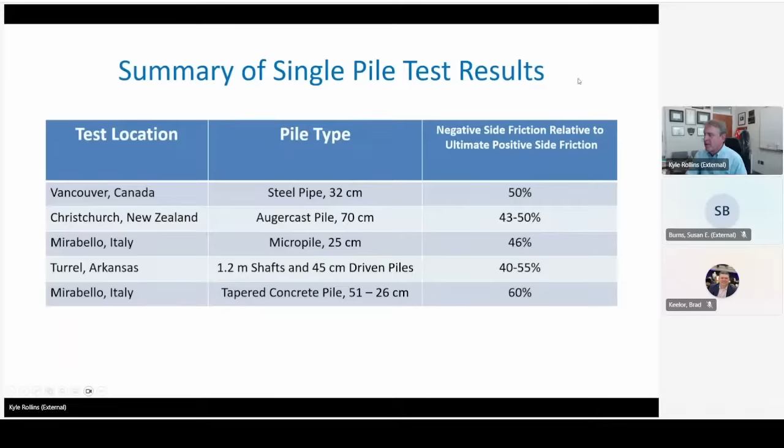So summarizing for the single pile test results for these 5 different test sites, I didn't have time to talk about Arkansas, but we're seeing values where the negative side friction in the liquefied zone is between 40 to 60%. So we think a value of 50%, which I indicated earlier when we were talking about the method, might be an appropriate value.

Some conclusions based on the single pile testing. In the non-liquefied soils, the negative friction was equal to the positive ultimate friction for cylindrical piles, and for this one test that we have available, 80% for the tapered piles. In the liquefied soils, the negative and positive skin friction after liquefaction and reconsolidation were between 43 and 60% of the ultimate skin friction before liquefaction. So we suggest a value of 50% for design.

These values are generally consistent for the available test results we have now, which are 17 piles and different pile types. And this suggests that this might be a typical result. The depth to the neutral plane increased and pile settlement decreased as the pile length increased, which is consistent with the neutral plane approach. Pile head settlement was also generally consistent with the neutral plane concept. We found that reloading develops positive friction from the top down, and that several months might be required for the liquefied sand to recover its full side resistance. It looks like my time is basically spent, so I think I'll stop right there and entertain any questions that people might have.

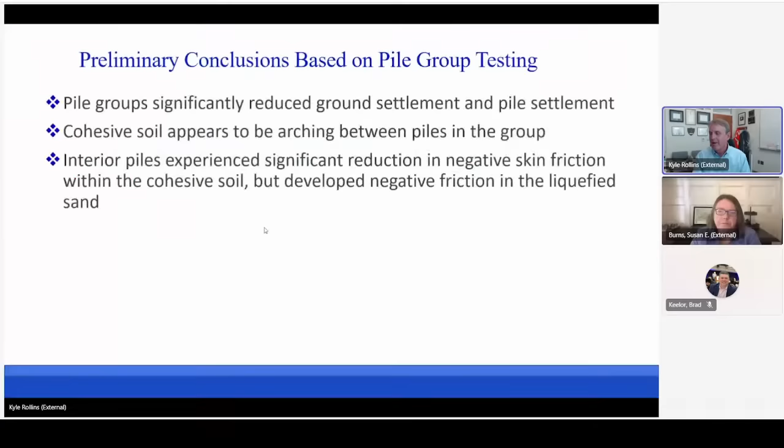Great. Thank you so much, Kyle. That was excellent. I do think we have a few minutes for questions, and I'll put a couple out there as we're getting started. I'm curious about locating the neutral plane. You said that this is a trial and error function, but it must also be a function of the thickness of the liquefiable soil zone as well. So could you give us some insight into how you work through that process of locating it?

Well, from our test, of course, we're measuring where the settlement is the same as for the soil and the piles, and we're measuring where the load changes from negative to positive. So we know where that value is, but for a designer, you don't know that in advance. So we typically would start near the bottom of the liquefied zone, because that is where the settlement is the lowest, and that usually produces a pile head settlement that's much lower than the settlement of the surrounding ground. At our site in Vancouver, Canada, the settlement of the ground was 11 inches, but the settlement of the pile was less than 1/4 of an inch. So just because the soil liquefies and negative friction develops doesn't mean that you have a failure or a problem. You have to look at the settlement that takes place. So if things don't work out, then I progressively increase the height of the neutral plane until I get convergence. It usually takes 2 or 3 stabs at it, and then you can converge.